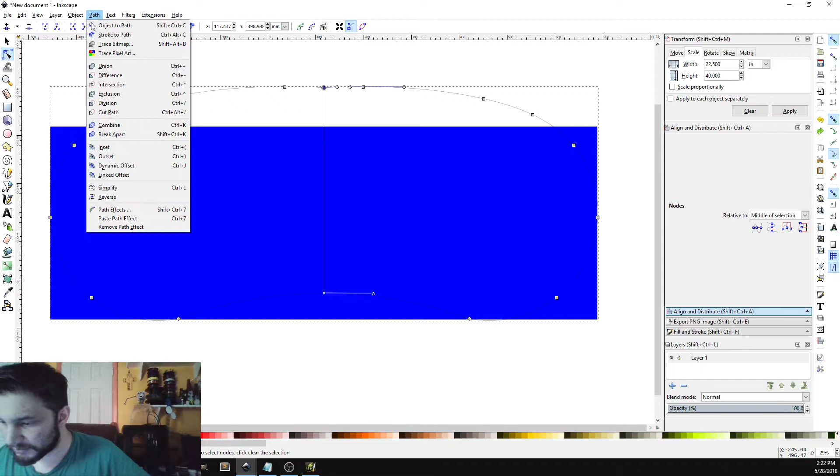Okay. Okay, split path. I have to find how to split a path. Path effects. Didn't do anything. Alright, I have to figure out how to lose this line and turn this into a single object.

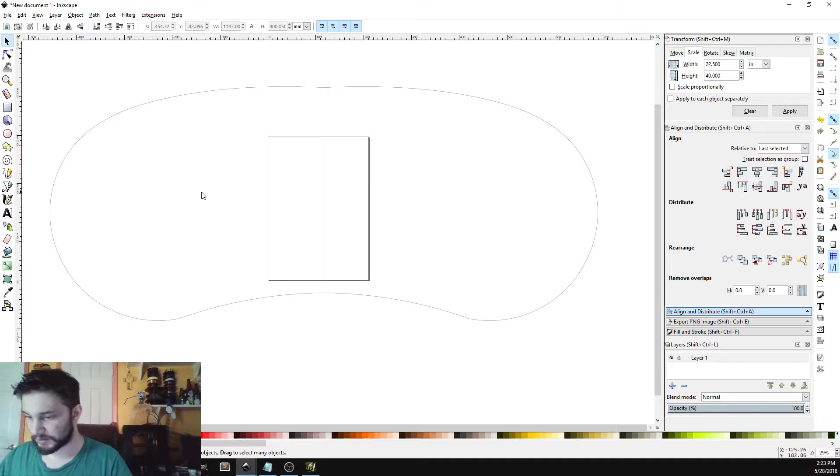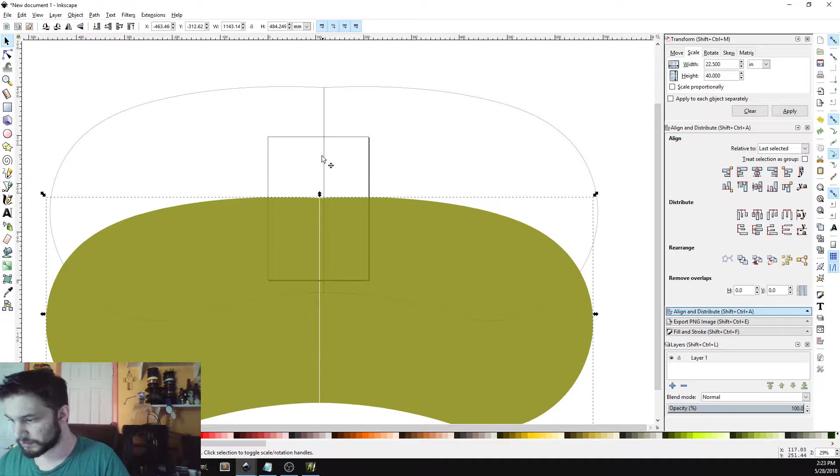Or better yet, just hide that for now. No. Alright, we'll move that to the bottom. Move that to there, and then we can go in here and try to clean up a little. So what I would do now to fill this out is just make a rectangle.

Could you? I wish it would stop snapping on me though. And then we go here and we go path, union, and now we just have these two little divot things to clean out.

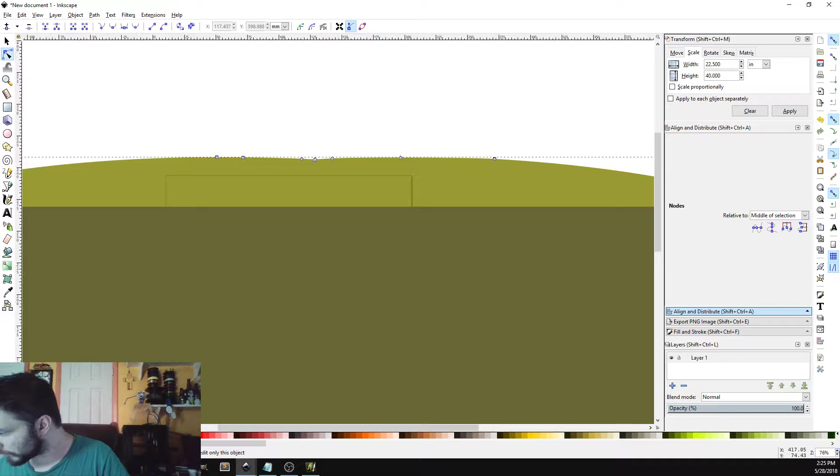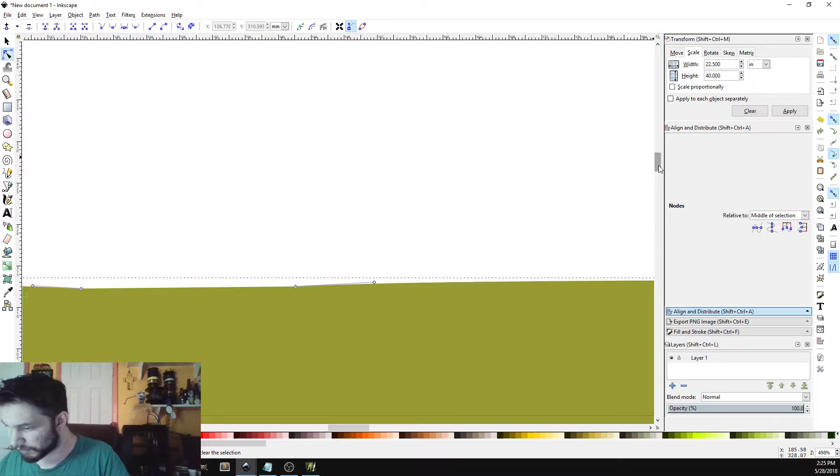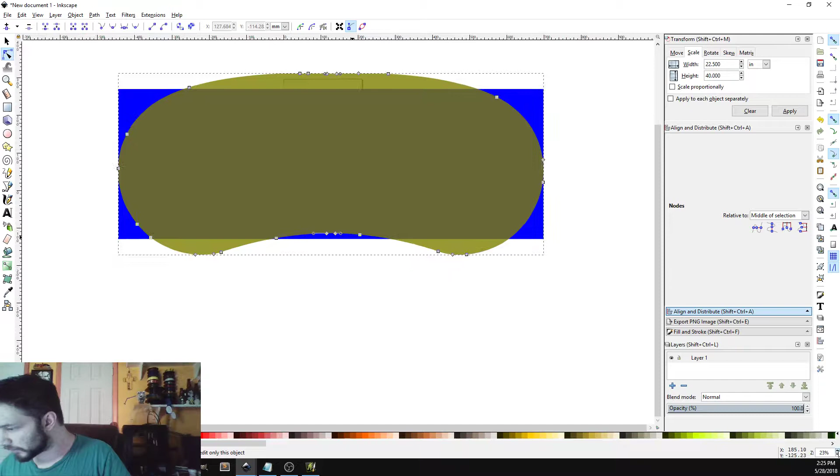Symmetrical, ready to go. Now we just have to make its width 45, height 15.75. Alright, apply, and we're good.

Now, one thing I want to do real quick is height 2.5. Okay, put that here, here. Line. Here, no, here. Alright.

So that's how much more I have to lose off of here. Alright, width 20. Oh no, actually just make this one, delete, width 20, apply. Alright, there we go.

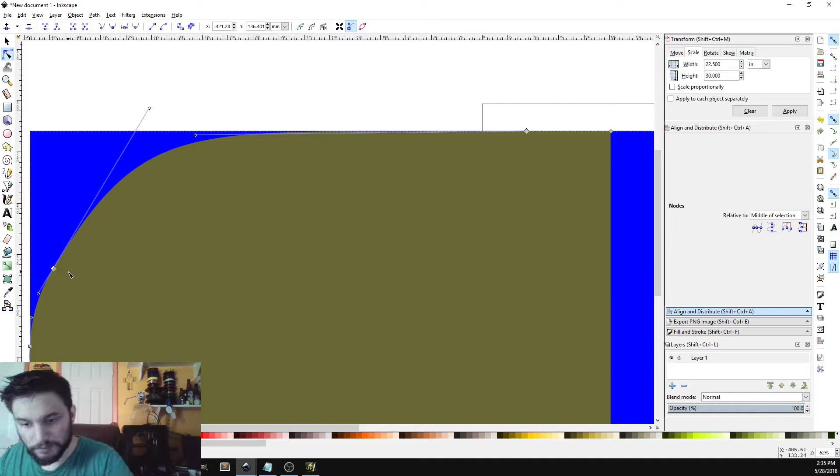Maybe, yeah. Maybe like that. That's pretty good. That's pretty spiffy. Let's just take that. Yeah, that fills it up pretty good and still gives me that nice rounded shape. I think that's what I'm going for.

So far this is pretty good. This is pretty much the shape we want. This gives us our 15 3/4 inch height. This gives us our 45-inch width. And it's got the 2.5-inch divot, with a little extra over here. That's fine, it's all good.

Overall, I think this is a pretty good shape. I think this is the one, finally. We got the shape. So now, just go back for all the fine adjustments, double check measurements to make sure we got all the ones that we need. Okay, 20, 2.5, 15.75, and 45. All the key measurements are there for the main shape, so Control D,

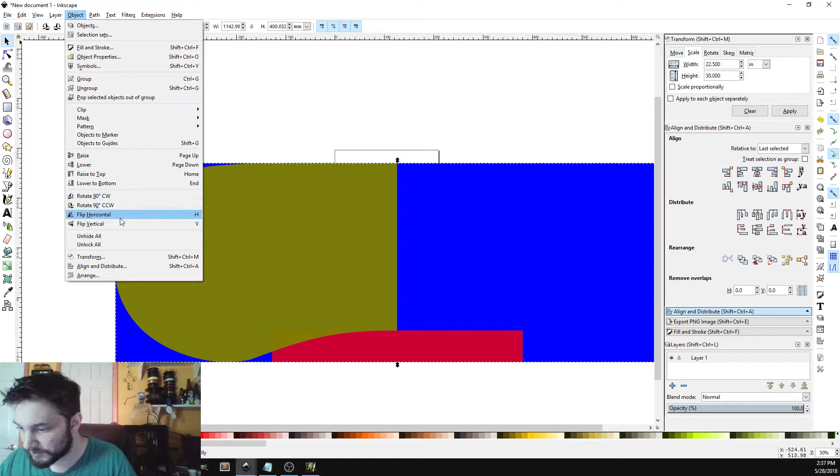Object, flip horizontal. Weird. Oh, what the hell? We have some rogue nodes here.

And there we go, line it up. Odd. Well, anyway, we'll do that, and that, and then we'll do that, and that, that, and that, and hold on. That.

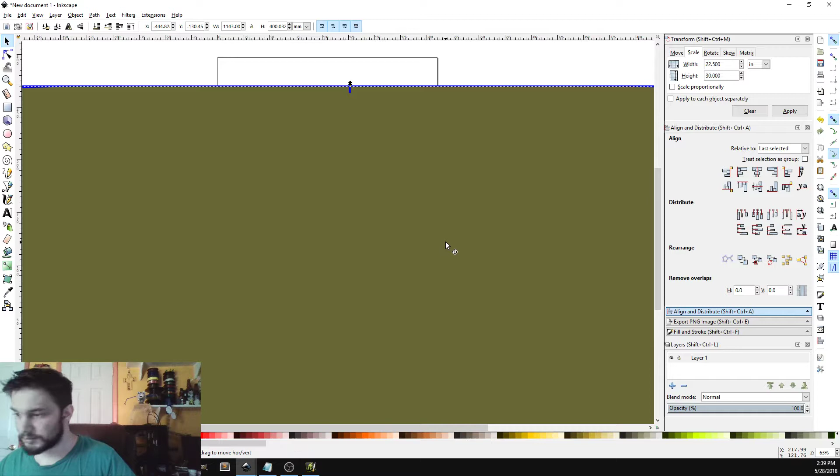And object path union. There we go. And then we'll just clean up. So this thing is currently - every time I click on it, I move it. Ridiculous, gotta be careful about that.

Okay. Okay, so its width is not in millimeters. Show me. Okay, so it's got the right dimensions here.

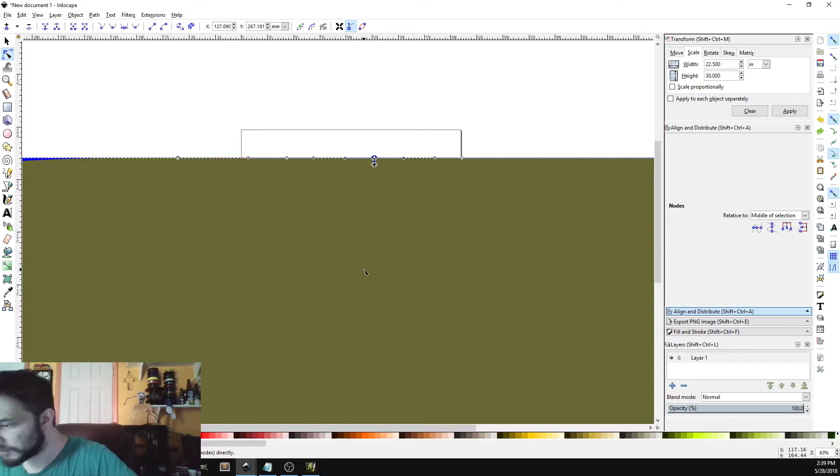So now let me just delete these nodes. Cusp block. Okay, so let's just lose these. Cusp block these, and call it. Looks good, looks fantastic, zoom out.

Okay, this is our shape. And this is going to span from arm to arm. This is going to have enough room for a computer. The computer is pretty much a square base when you include the fans in the back. Looking at about 12 inches by 12 inches, so we need enough space to hold it here.

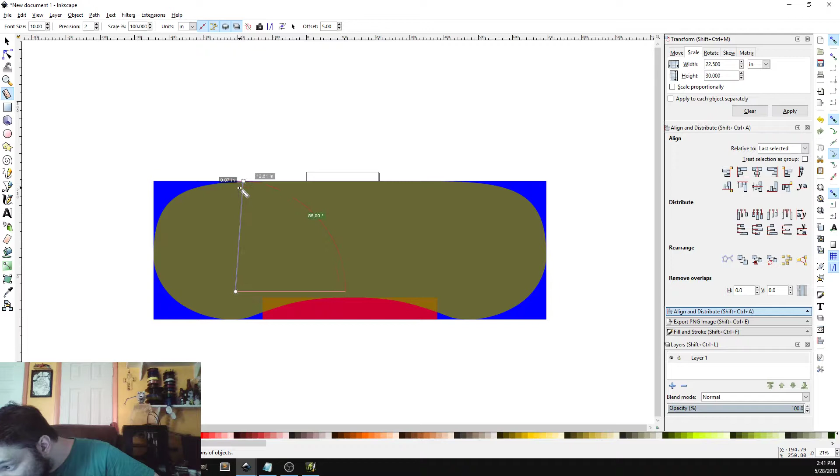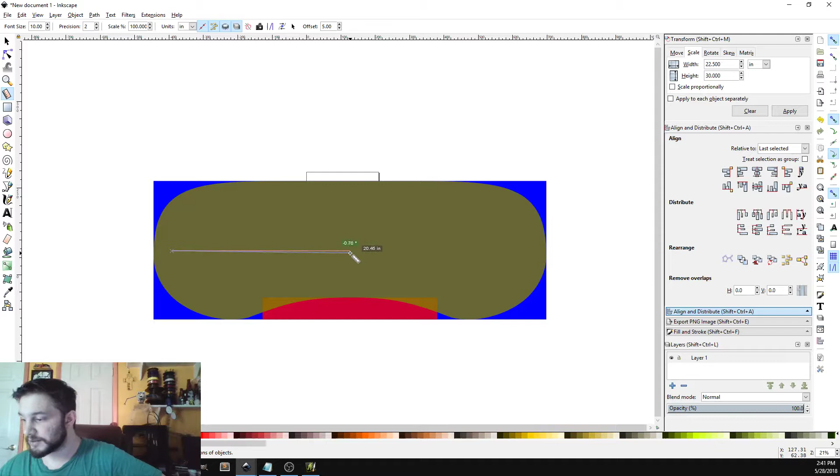12 inches, 12, way more than 12 inches. If it's at an angle, 12 by 12. It's probably closer to 12 by 10, but 12 wide, and there's plenty of width. More width than you know what to do with. So let's save this for now.

Right here. Desk base. Oh, I got caps lock on. What am I doing? Reverse camel case. Alright, call it llama case. I don't know. And then we're gonna do a save as again

with mouse pad, because we are about to do the mouse pad. So now the mouse pad is going to be a lot more straightforward. So we're going to pick a different color here. Nice green, gonna do this. Mouse pad is 14 wide by 11.75 deep.

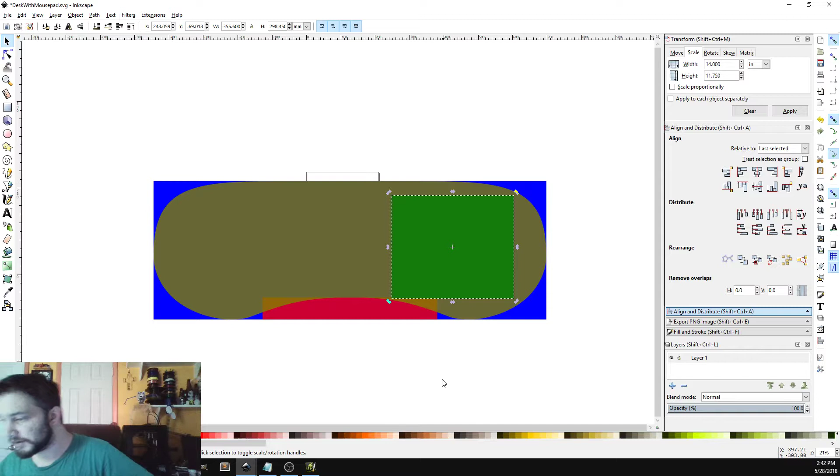Okay, now we'll fit that here, thereabouts. It's gonna have to be rotated a bit, obviously, to fit better. But first thing is to take the corners down. I wonder if there's a way to just do that. Or if I'm going to have to take the circles I want. So let's look that up real quick.

Rounded rectangle. Make a shape that has rounded corners. Click on the rectangle tool. Oh, right.

Horizontal radius of rounded corners. Huh, well, I'll be. Let me double check if that's... did we just do that? So simply? I think so.

So let's get a circle. Make you 1 and 1. Line you up there. You actually did it.

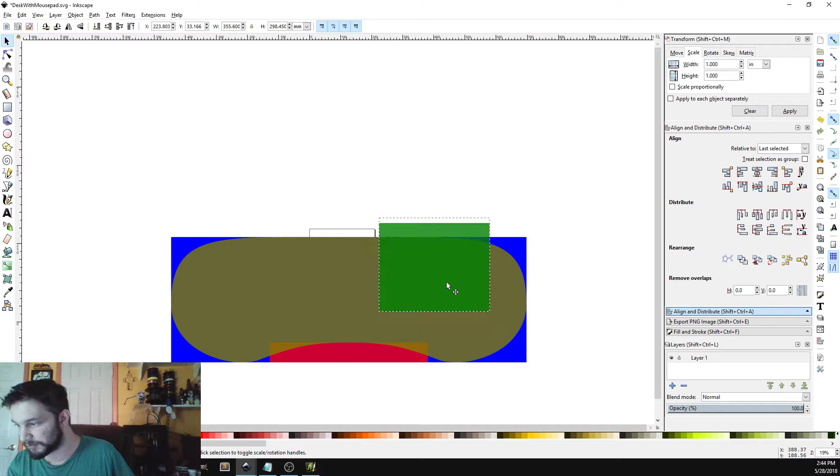Well, ain't that something. Okay, so we got the mouse pad. It's a very big mouse pad. And we just got to rotate it a little. So we're going to make this like a 10-degree maybe rotation. Yeah, there we go.

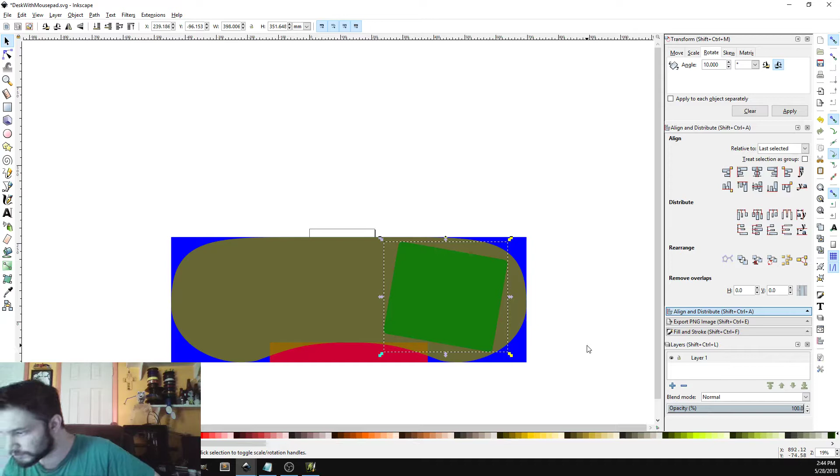And then to make things a little even, why do you keep switching to millimeters, you motherfucker?

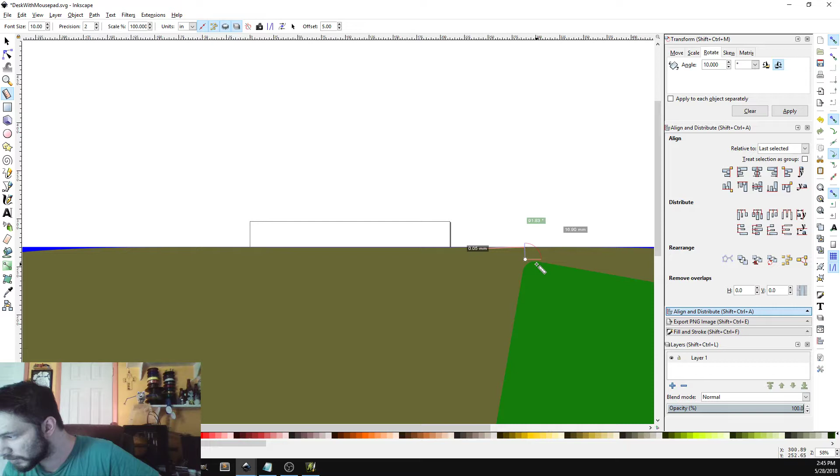That's less than an inch. That's a bit. It's only going to be 0.2 millimeter. It's only going to be 2 millimeters deep, the pocket, because that's the thickness of the mouse pad. So it wouldn't weaken it too much being too close to the edge, but I don't want it too close to the edge.

So that's about 1.5 inches. So what we're going to want to do is just shift it around until it's in a more comfortable spot.

There's plenty of room to put your mouse in your hand anyway. I can raise that a bit now, actually. Look at that. Make it look about even-ish.

I'd say that's pretty good. And the thing is, for the handles, I like the shape of the desk so much that I'm going to copy it twice. The desk itself.

So we're going to take this, duplicate it, and remember when we said 5 inches should be enough to stick your fingers in? I meant that. And...

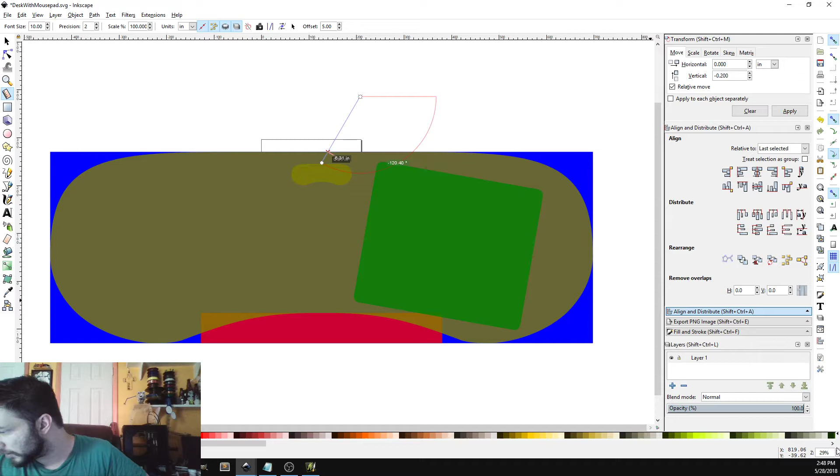And negative. There we go. Now we'll just take one more measurement real quick. Okay. Yeah, so it's about an inch away.

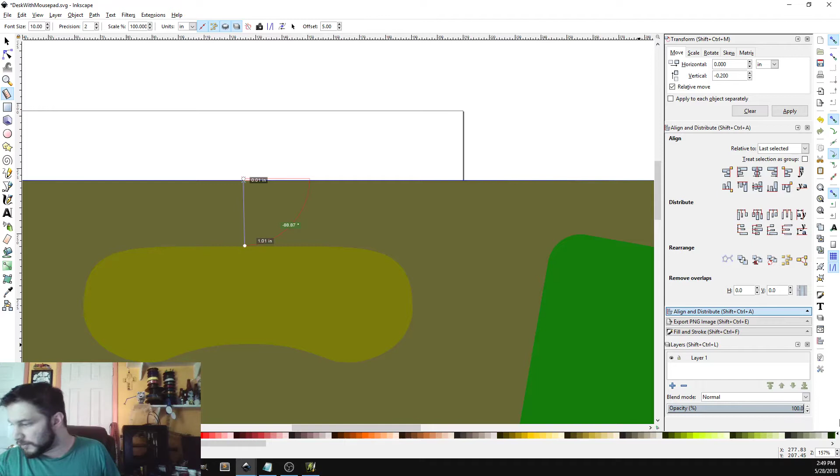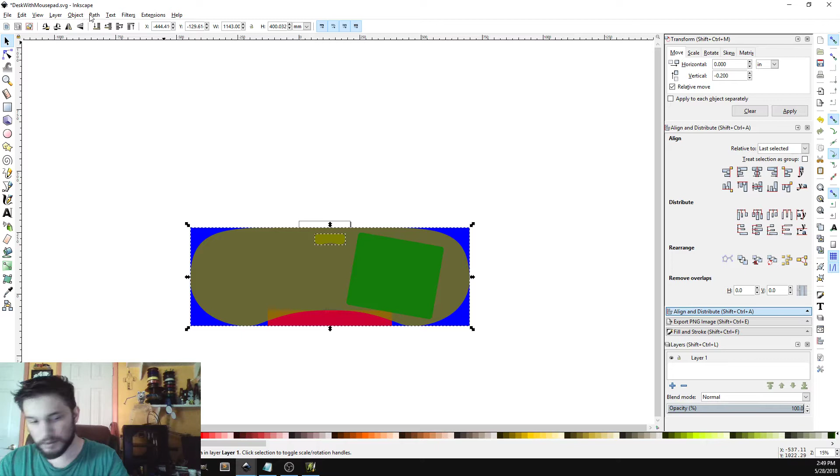So, zoom out, take it, go here, here. Well, hold on first. And then cut it out. And then rotate you 90. There we go.

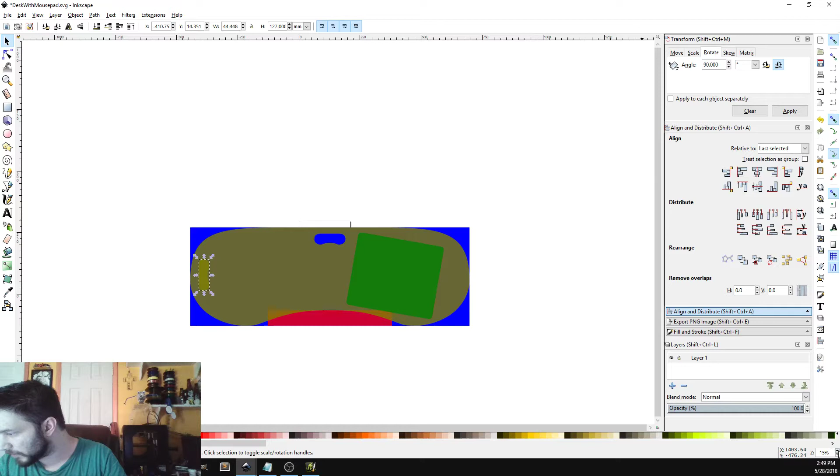Put you about here. I'd say we don't want, again, to take more than, we don't want to leave more than an inch of wood. So let's line that vertically. And just measure real quick. We got at least an inch of wood.

Alright, because you don't got enough wood, you can't really perform. Alright, and control minus, and we got 2 handles cut out.

Now I think I want to rotate this back the other way. Negative 5. Like that.

Like that, or like that. Like that, or that. That, or that. I think that. I think that's the move. Alright, and again, it's just going to be a very shallow pocket, so it's fine if it comes closer to the edge, as long as there's enough room for when I do the round over, but there's still some wood beyond that. So there needs to be at least 1/4 of an inch, rather than at least an inch.

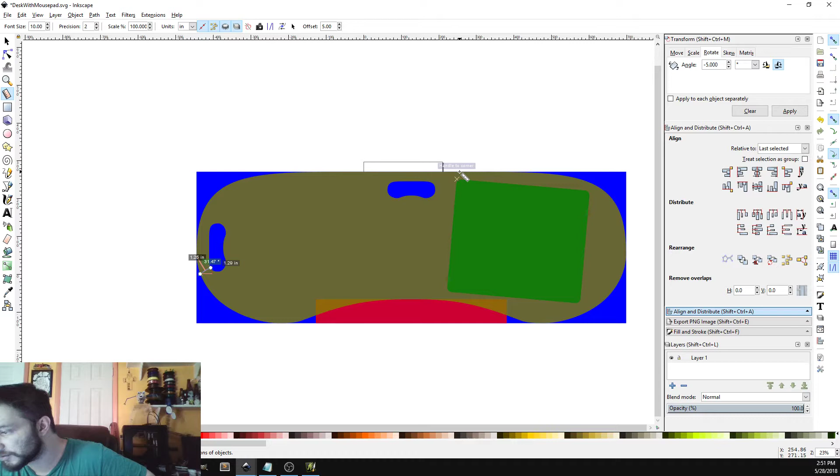0.89. Let's see. Yeah.

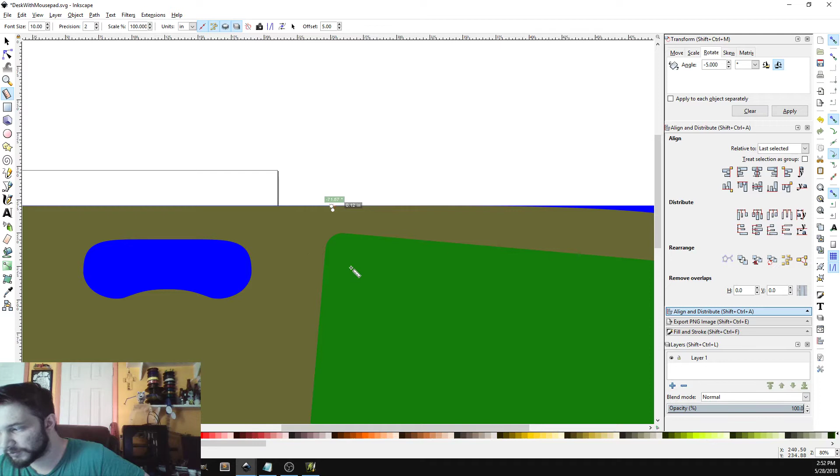Yeah, about 0.85 inches, so when I have the 1/8 inch round over here, this much is going to be rounded over about, and then it'll be this much flat wood past it, so it's fine. Same here and here. So...

That's it. Now, still kind of want to put the drink holder.

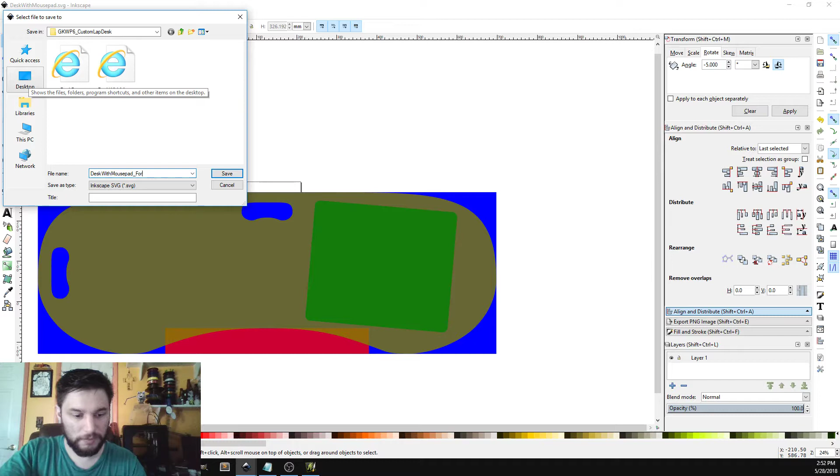So anyway, what we're going to do, save as for shaper. The difference between a for-shaper file and one that isn't is: A, it's going to be the right colors, and B, it's going to... just making sure I didn't drag it when I clicked it.

A, it's going to have the right colors, and B, it's going to... hold on.

Not have any of those guidelines I had in, you know, the red and blue chunks. You gotta take those out. Gotta set the colors right. Oof, staring at that yellow so long, the black don't look like black anymore. What's up with that? Anyway.

Let's see, you should be roughly, we'll take it from the middle, the average. Stop changing the millimeters, son of a... yeah, I wanted it to be about 5 inches away from there and about 26 inches away from there.

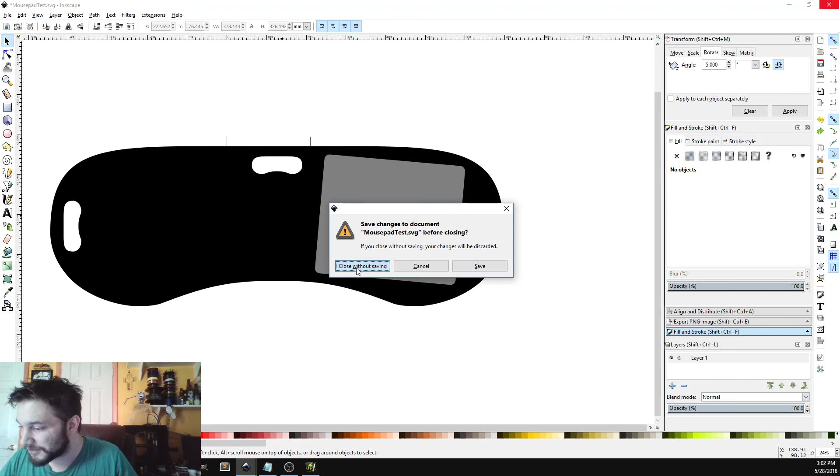So close without saving. Looks a lot better than this. Close without saving.

Alright, so that's it, come back Thursday to actually cut it out. And why does YouTube say it's only been 44 minutes when it's been an hour? What's going on, YouTube? Okay, I guess a chunk of the stream got lost. Oh well.